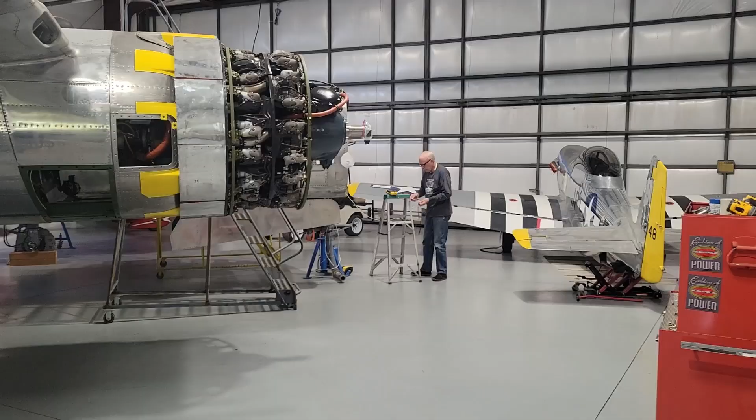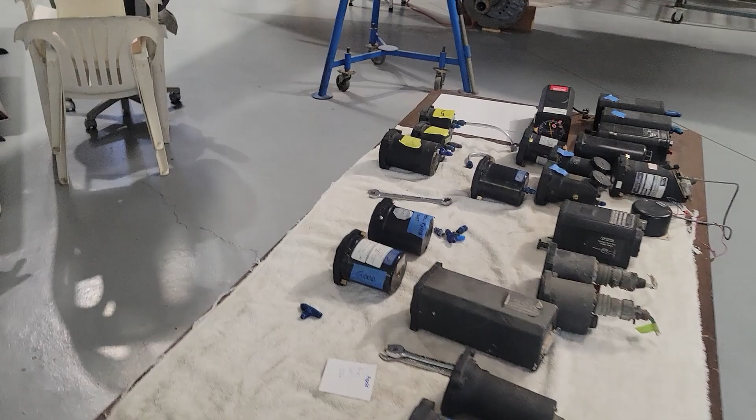It's the start of the week. Just getting started on doing stuff, sorting more screws. Hopefully we'll get that pipe tested to make sure that it's not leaking. John, our Sparky, is still gone today. Bob's over here, he's wiring for the intercom on the airplane. We haven't been able to do much on testing equipment. Dave's been otherwise occupied on other projects, and I've just been sorting screws, trying to get through it. So we'll see how the day develops, and we'll get back to you.

So last week we made the repair to the pipe for the ram that closes and opens the door in the passenger compartment. I found out the reason why that wire was disconnected. The wire was kind of not wrapped up nicely, so Jan had John disconnect it, and we got that back where it needs to be. So we're ready to test to see if we've got a leak. Stand by and we'll find out. All right, so hopefully that's a bird's eye view for you. You guys let me know if it leaks. All right, Jan.

Okay, so what do you guys think? That looks pretty dry to me. Nothing going on there, that's great news. Okay, we've got a gauge in here, let's see what that says. Okay, Jan, you want to run it again?

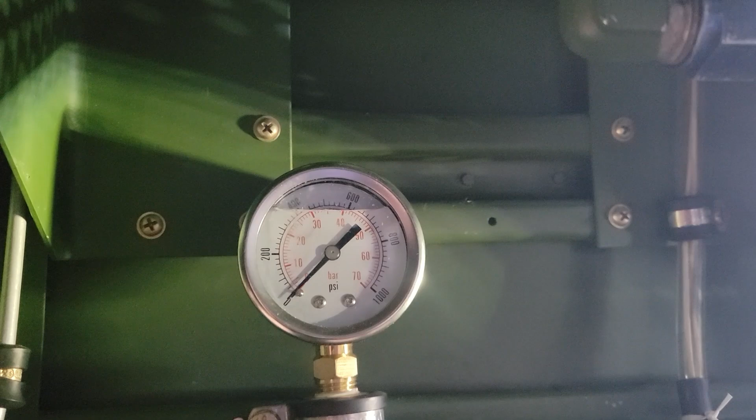So when we first got this airplane, it was sitting like 2 foot off the ground, and the only way we could get into the airplane was going up over the top or trying to climb in through one of the windows. So eventually we took the door off so we could climb in under the belly, and Jan rebuilt the door 10 years ago. We've just been waiting to get it where it is now so that we could operate this door.

Well, we came up with a set of rules on how this door closes. So you got the door, you got the stairs, Jan's in here. Eventually, when this is all done, there's a flip down door that is the floor of the airplane. And once the door is closed and this panel's down, it'll be just like a seamless cabin floor. So we've got the rules here, they're kind of hard to read because they're sideways.

Door open sequence: stay clear of steps during operation. Push button momentarily while unlatching - this is to let it down. We don't have the instructions on the outside yet, but essentially it's push the button, let it come up, and then there's a handle on the bottom, I'll show you that here in a minute. You latch that, and then you let go of the belly door operation switch.

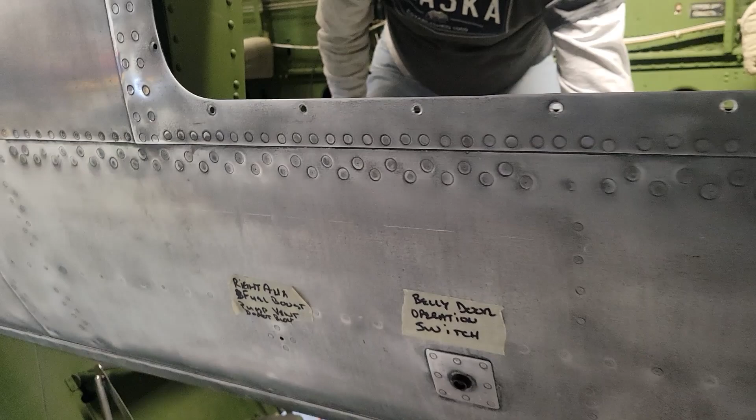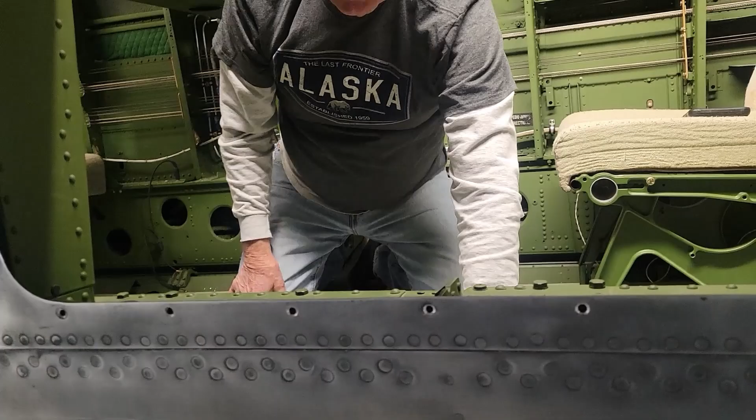So Jan's going to go ahead and show what happens here. The first thing is he's inside the airplane as if we were getting ready to depart. So first we'll raise the steps. Next we'll come over here, and now we'll push the button to close the door, and latch it up - there's the latch. And then to reverse the procedure, we'll push the button, unlatch it, and then it falls down on its own accord.

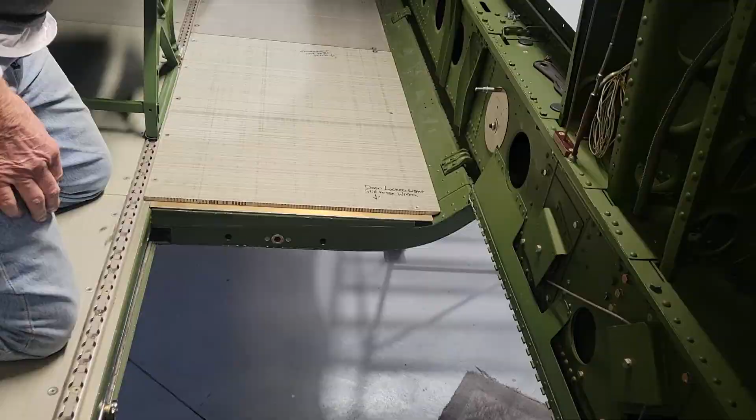So this is what it looks like from inside the cabin. Jan's going to go ahead and I'll pull the stairs up. Now, I've seen some of these doors on other aircraft that as soon as the door comes up, it retracts the stairs. We don't have that mechanism, so this is what we have to do - we have to put the stairs up, otherwise they collide with the fuselage. So then Jan hits the button over here, and this is what it looks like.

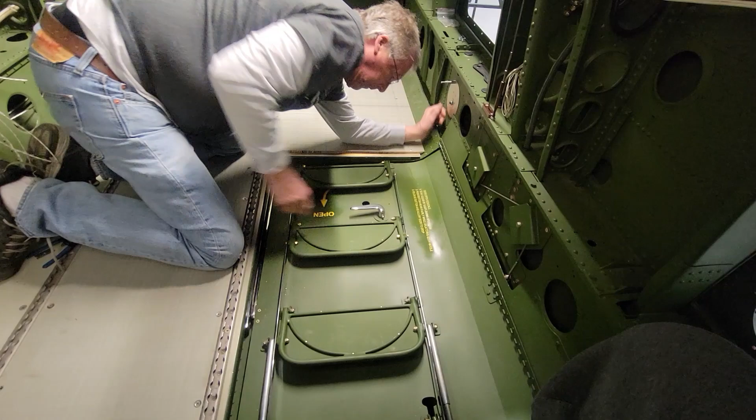And then, like I said, there's a door that'll flip down here that'll cover all this. It'll look the same as if this wasn't here, it'll just be this over here. So you want to go ahead and drop that, Jan? The reason why we decided to pressure the door is to get it up off of the latches so that it's not dragging in and out of the latch holes.

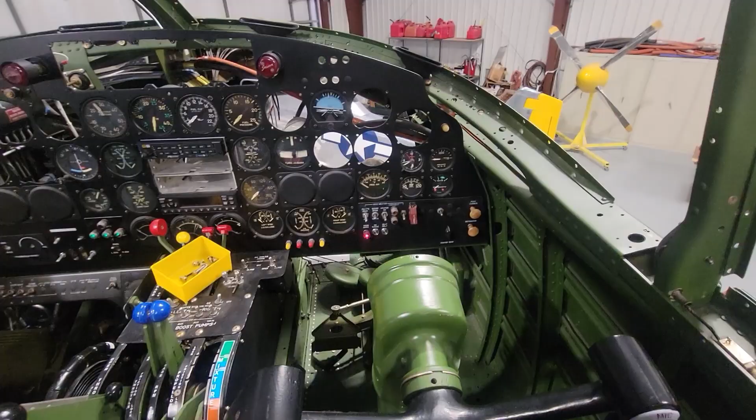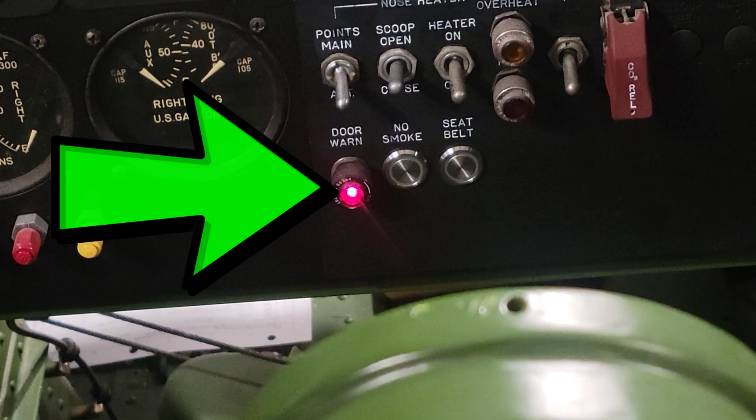So got one more thing to look at while this is going on. Hold on, one last thing that we want to make sure we know. You can see that red light on - that means the door is not latched. So we're going to test to make sure that that light goes off. So Jan, you want to go ahead and run the door?

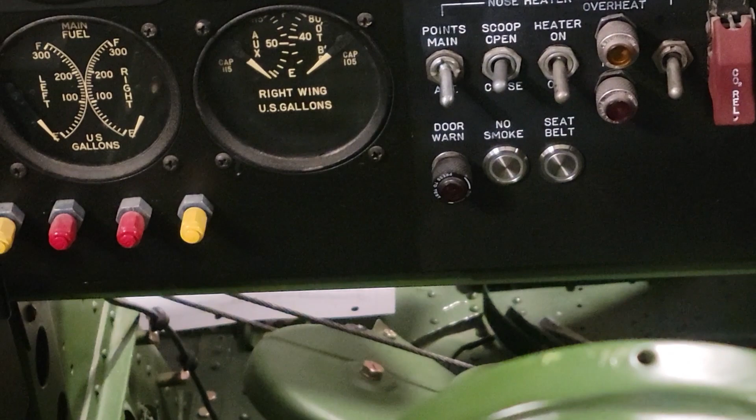And there it goes. Fantastic, so that's another system completely ready to go. Go ahead and drop the door, Jan.

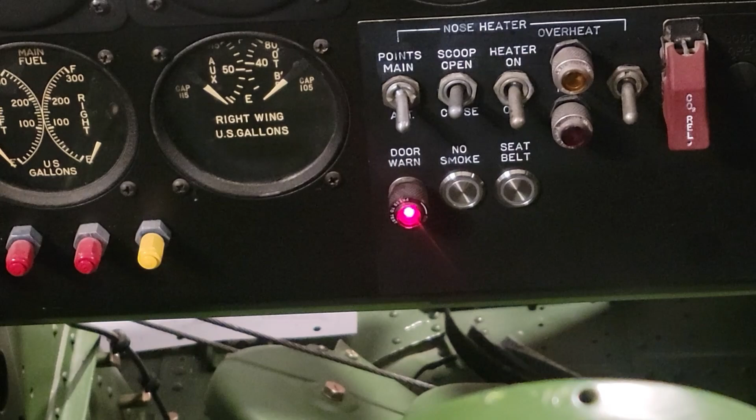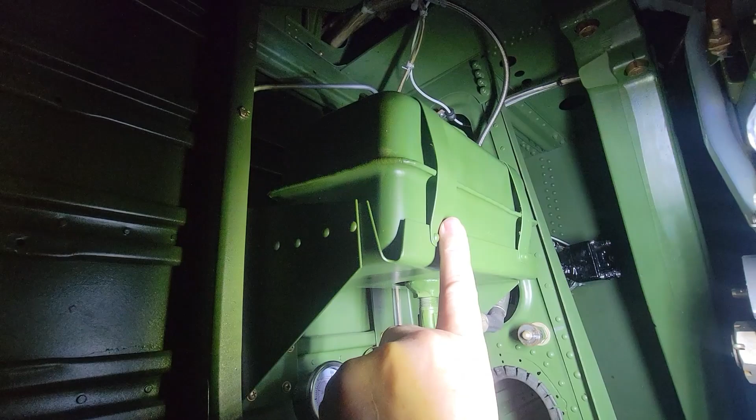That's so cool. So just to give you an overview of how this all works, this is just a simple hydraulic fluid pump. It goes through this, comes out of this reservoir, goes through this main line over to the pump. Then there's this flexible line that comes off the pump, and it goes over to the cylinder. Here's where that line comes out and feeds the cylinder.

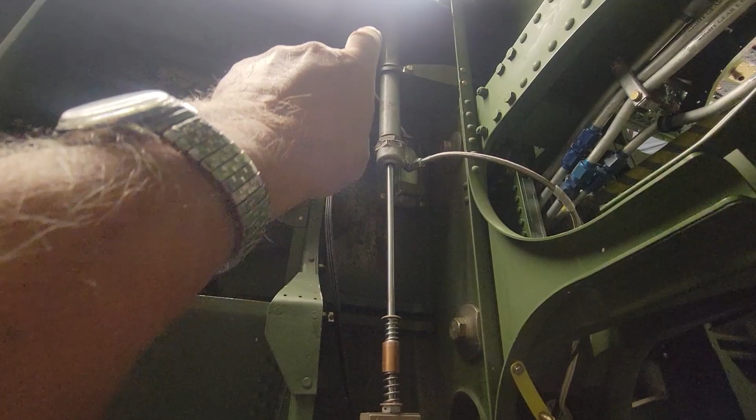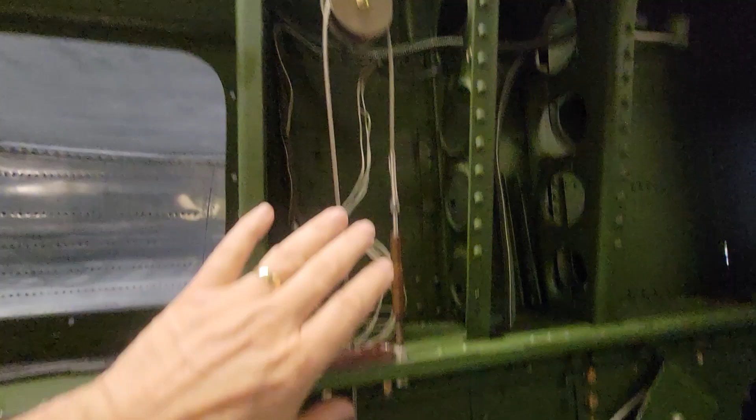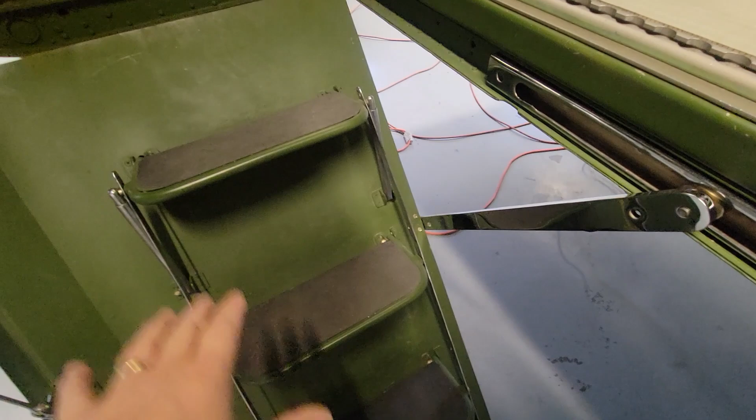This cylinder is only single acting, and it retracts, and that's what pulls all of this cable assembly up, and this cable is what closes the door. This is just an arm. So when this is fully extended, this is not fully extended. When the aircraft gets in the air, it's going to have a few more inches of drop. This should go right clear back into here.

And so this relief valve right here is an adjustable regulator valve, and all it does is control the amount of pressure that's being fed to the cylinder, and it's also the buffer for when the door falls back down.

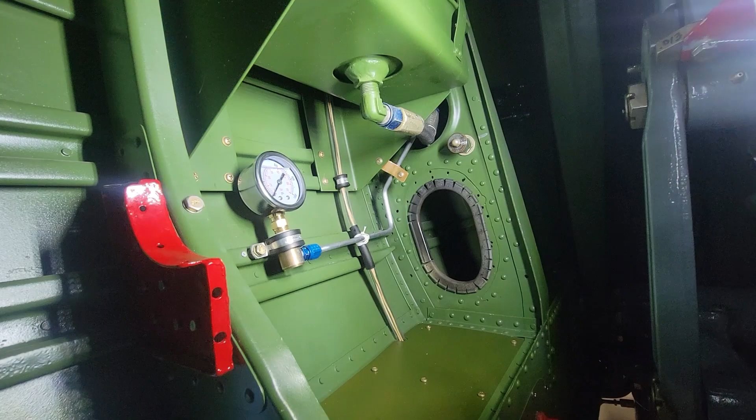And so, Jan, this looks like a really good system now. I think it's pretty tight. Looks really nice, wheel well is turning out to be really quite beautiful. And functional. We're pretty happy with making sure we've got everything safetied and tied up in here. I just need some jacks to get this thing in the air.

Anyway, onward, we'll see what the next thing is.

So Jan and I are on a little field trip, and this is a great day. Let me turn the camera around. I'm standing here with Kelly and Jan. Kelly is our man at Duncan, that's going to paint our airplane, our wing. Anyway, what kind of jet is this? This is a Challenger 604. So this is obviously a paint booth that's big enough for our airplane.

This is exciting, so why did we come over here today, Kelly? We gotta get the paint matched up as close as we can, since the flight controls have already been painted on this aircraft. So this is super. So you have two paint booths? Correct, yeah, when we walk down we can show you the other one. But this is basically where the majority of the painting is done.

We'll do a little bit of paint work down on the other side, but that's more for the stripping side, the priming, and the sanding. Okay, so this is pretty much exclusively painting over here. This is fully climate controlled, air conditioned, heated. So can you fit a 737 in here? No, not quite. The biggest plane we've had in here is a Global 7500, and when that's in here the tires are kind of about up at the front of these grates. Really? Yeah, that's pretty huge.

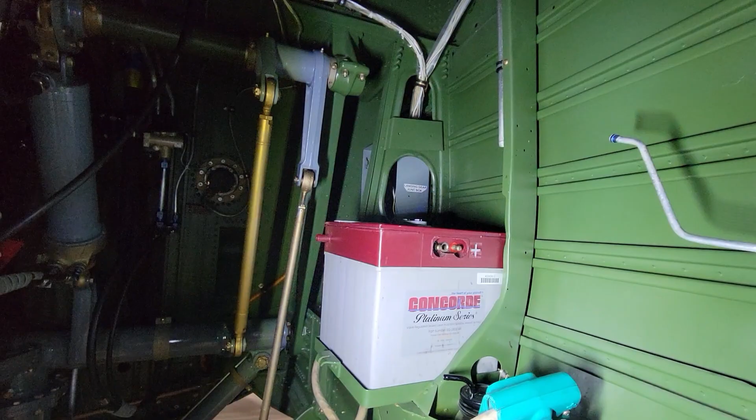Okay, this is what we've been using. These are Concorde Battery's Platinum Series, just like the ones we just got in freight. These were removed from old aircraft after they'd expired for use in the field. So we've been able to use them for testing, but they're nowhere up to snuff for starting engines and running this airplane on a normal basis. Concorde Battery, the corporation, they really love to support the warbird community, and so here we are.

So we've taken delivery of 2 brand spanking new batteries for our aircraft.

Well, so we've done what testing we can do in here for instruments. Let me tell you what's going on. So the jury is still out on these because we don't know if these are pressure turn and bank or if they're vacuum turn and bank.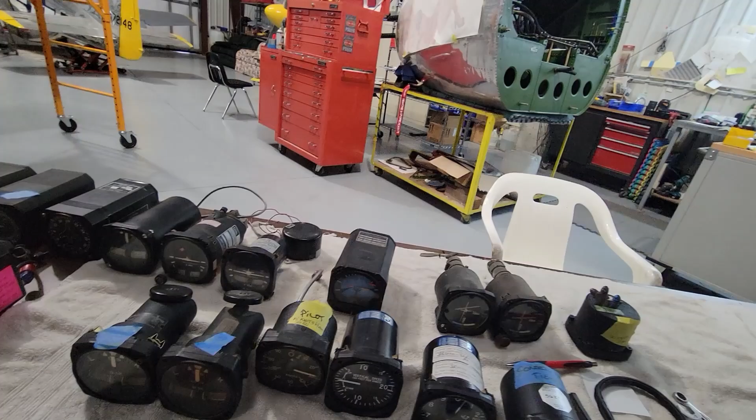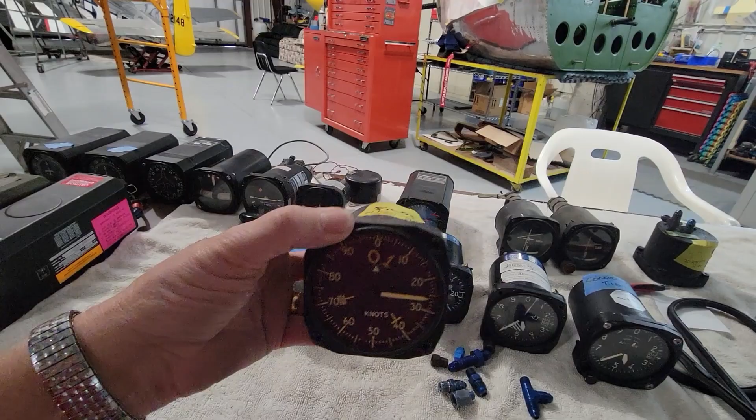Here's one of our airspeed indicators - it's already starting out at 25 knots, so that's no bueno. Here's the other airspeed indicator - these were both in the plane, by the way. This one is already starting out at 30. That's not going to work.

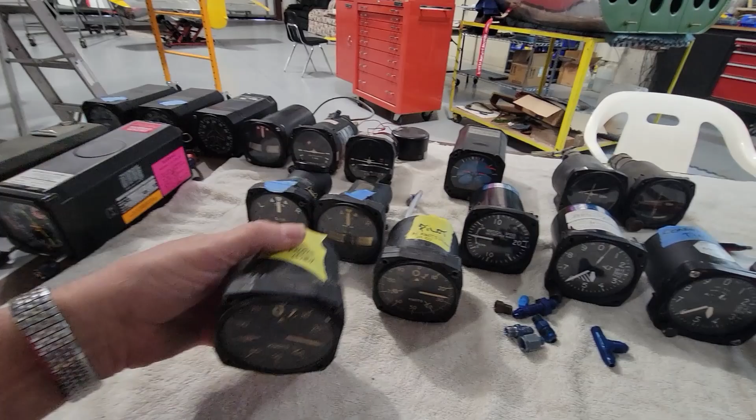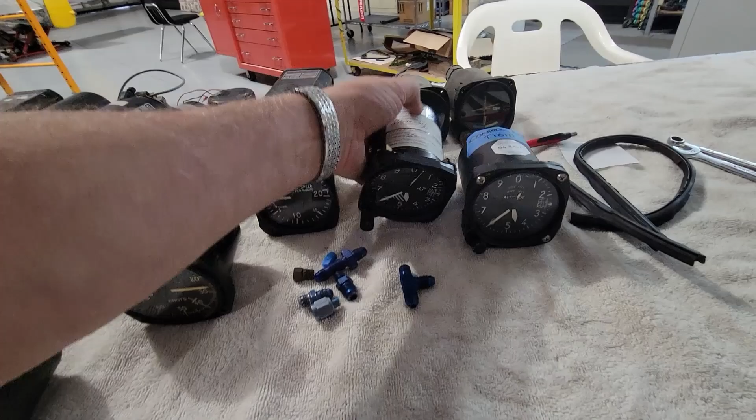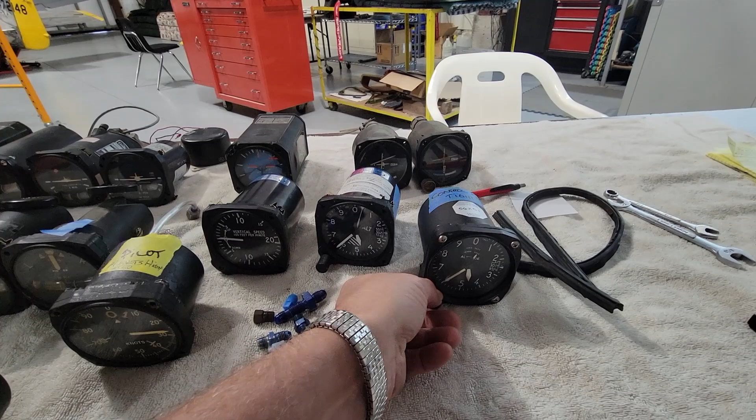Now we do have a good altimeter - this one works great, this is the one we tested in the video. This is a VSI, vertical speed indicator. The problem with this is that it's only 2,000 feet, and A26s can do a lot more than that. We do have another altimeter, but the control knob to dial in the barometer is way tight, so that's not going to work.

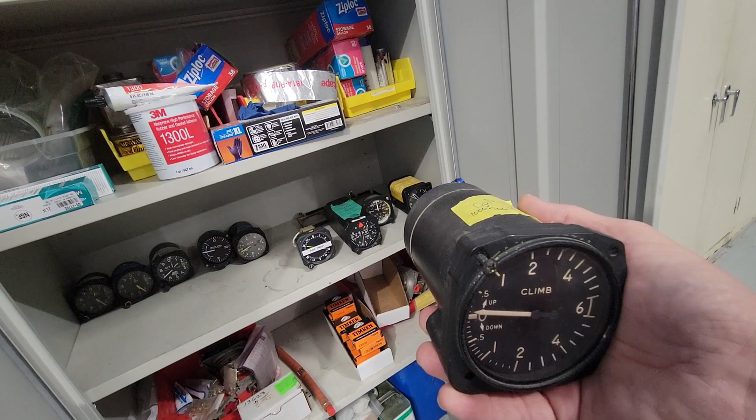The rest of these instruments on here, these are all stuff that we don't have the ability to test. Okay, these are the ones we could test. This is the VSI for the co-pilot - it came out of the co-pilot side, and it's reading 1,000 feet too high. This is the pilot side - it's got a really sluggish needle when you put vacuum on it, and it's inaccurate as well. This is probably a good vertical speed, but we don't have this kind of cutout in our instrument panel.

This one here tested out has an erroneous reading. It's not where it's supposed to be. That's the altimeter. Here's another altimeter, and this one is reading 250 feet too low. This is an altitude indicator, but if you watch the gauge, the numbers move when you rotate the dial, so that's not going to work.

So we're really on the hunt for instruments for our airplane.

I'm up here in Jan's office, and we've had a couple of meetings about the Annunciator Panel. A couple of weeks ago I was talking about the Annunciator Panel in the dash, and I didn't think we were going to do it that way. Well, we've come around to thinking about it a different way, and we are going to do an Annunciator Panel between the fire suppression stuff. Let me turn this around and show you what's going on.

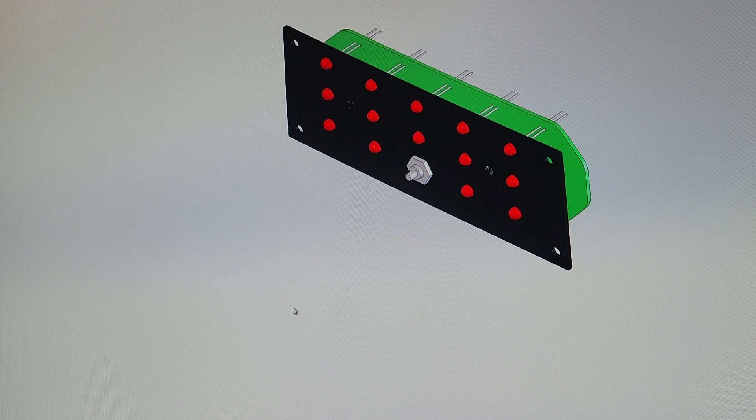So we've come up with this little panel right here, and each of these red things are LEDs, and they're going to be hooked up into the system to sense different things in the airplane.

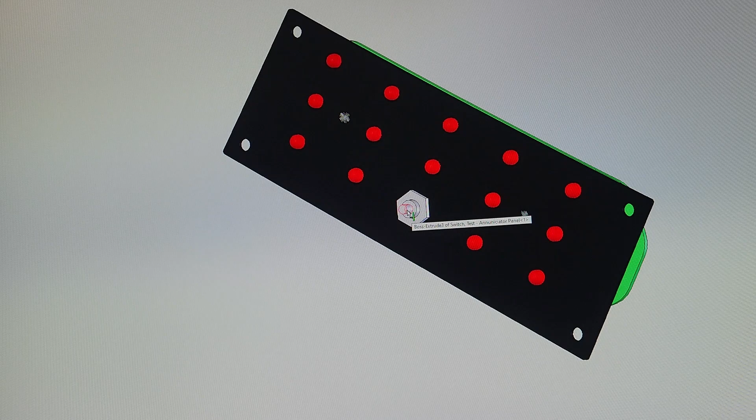Like we'll have oil pressure here, fuel pressure, oil temperature. Down in here we'll have a starter disengage, vac system, and a spare. And here we'll have a test button - we push this button and get an indication that all these lights are working properly.

This will also be tied into the master warning buttons on each side for the pilot and co-pilot, so they know that those lights are functioning as well.

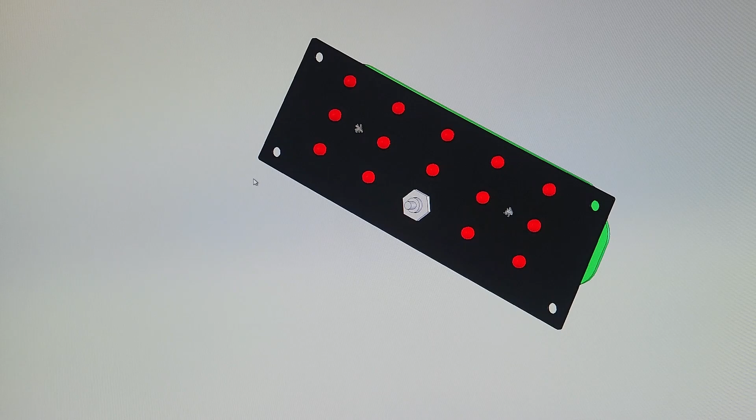So anyway, the challenge here was to come up with a part that was going to fit into the room that we had here, and be able to put this in the airplane so we can put it in and take it out as needs be. Anyway, so what we have here is the...

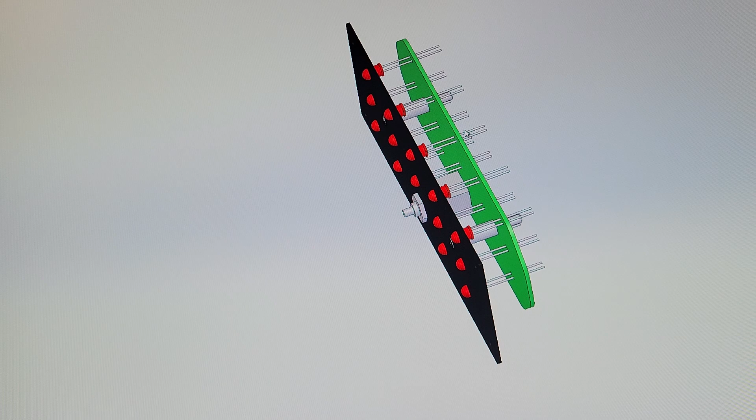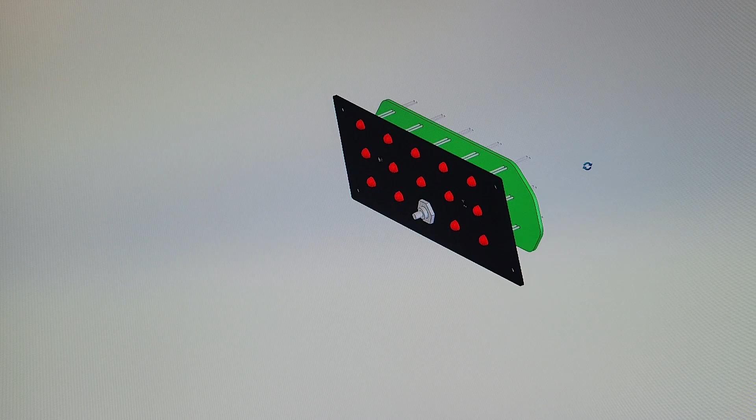...front panel in black, the LEDs, and then the printed circuit board. This particular design is not complete yet, because on top of this board here, the main board, there's going to be another piggyback board that will carry the connector, the input-output connector, as well as a processor that can go on there, and it'll electrically hook up to this board here.

And then whenever a light comes on, we'll have text right in here to say what's at fault, or tell the pilot to look down on the instruments to see exactly what's going on. And that's basically what an Annunciator panel does - if you're not paying attention, it will alert you that there's a problem somewhere in the airplane.

Correct. So you have a master caution - it'll tell you to look at the Annunciator panel, and it'll tell you to look at an instrument if you're not already paying attention to the instruments.

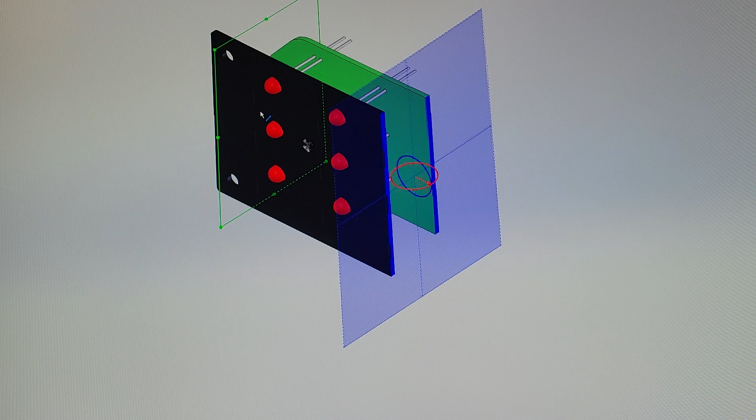One of the cool things here is that as I'm doing my work, I can cut this open and go back and forth and see how things are looking. And you do this in SolidWorks? Yep, this is SolidWorks, correct. So there's that - that'll be our Annunciator panel.

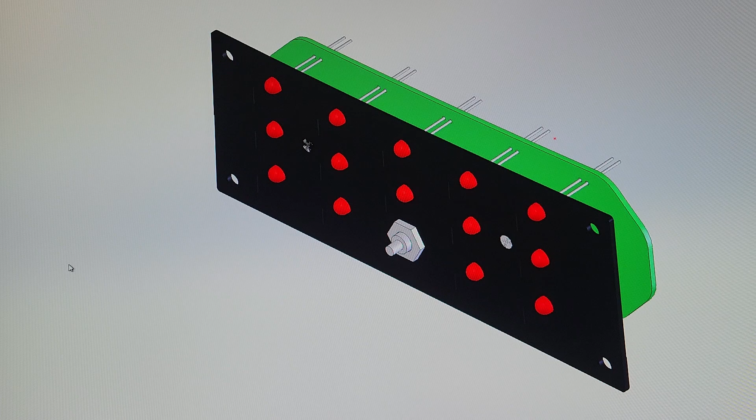Pretty cool. Okay, well it's Friday. We've had a couple of meetings on this Annunciator panel. It's busy. We're really fortunate to have John and Bob, our Sparkies - they understand this stuff and how to make electrons move around.